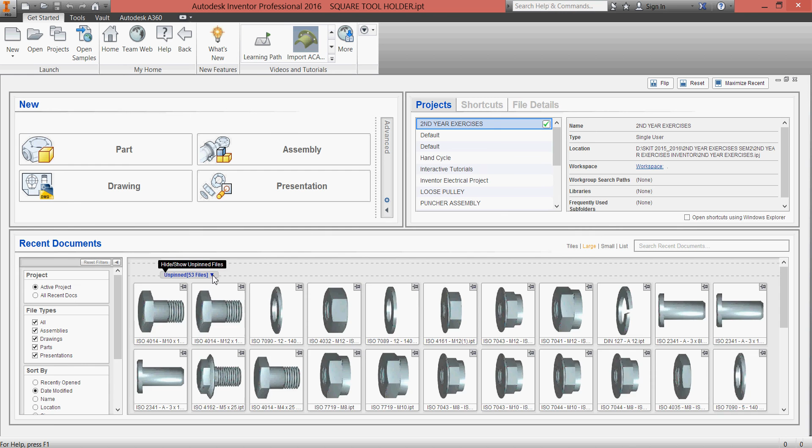I started my Inventor 2016, and this is a new look where we can have several dialog boxes here. This is a new dialog box. We can start our part, drawing, or assembly. This is projects; if you have already worked on projects, you can select your project from here, and it will show the parts or assemblies you worked on. You can close them like this. First of all...

We are metric users, so we have to set our part, assembly, and presentation to be in metric. You can go to this button, configure, and choose millimeter and ISO as default templates. I already chose them. Click OK and everything will be fine.

Before I start any working on Inventor, I prefer to make a project file where all my work will be stored.

So I'll go to projects from here, and go to New, Single User Project.

Next I'll give my project a name, for example, Inventor...

2016 tutorials. And here you can store your project file wherever you wish.

I prefer to store it on the E drive, and here I'll make a new folder and name it the same.

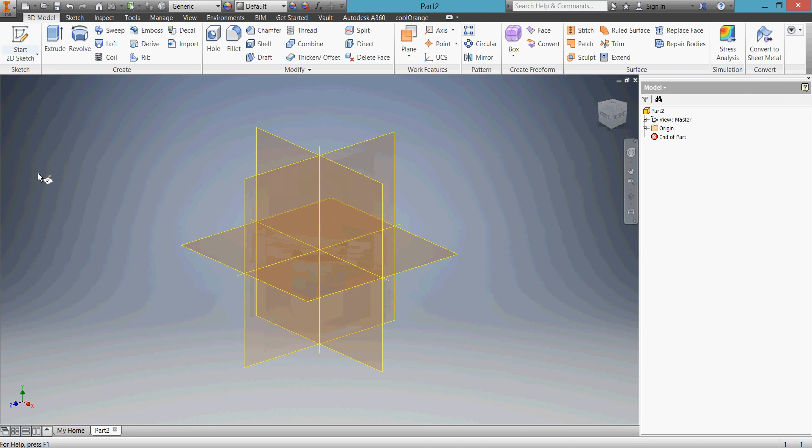This is the part. From here I'll click on 2D Sketch, check on my YZ plane, and start sketching.

Let us memorize what we'll do. So we'll sketch this shape.

Okay, I'll sketch it roughly first, then give it some dimensions. A line from here without any dimension, just making it horizontal. Can you see the signs? Horizontal, vertical, okay.

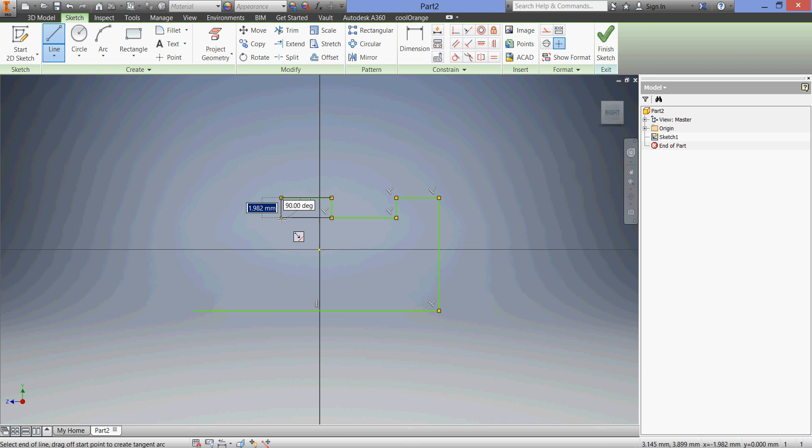Okay, okay, and go down — it's perpendicular. Okay, up here, down. It's too easy.

Here and close. Can you see the glyphs? These we call glyphs.

Okay, what do we have? We have this one, this one, and this one the same size, so I'll give an equal geometric constraint. This one equals this one.

Okay, existing — this one equals this one, and this one equals this one.

Okay, let us give some dimensions. I have a dimension from here to here equal to 100, and it automatically...

gives us a suitable dimension for all the other parts. This is what's good in our new version of Inventor.

And the height is 40. From here to here is 40.

From here to here it's 6 millimeters, and this one is 18.

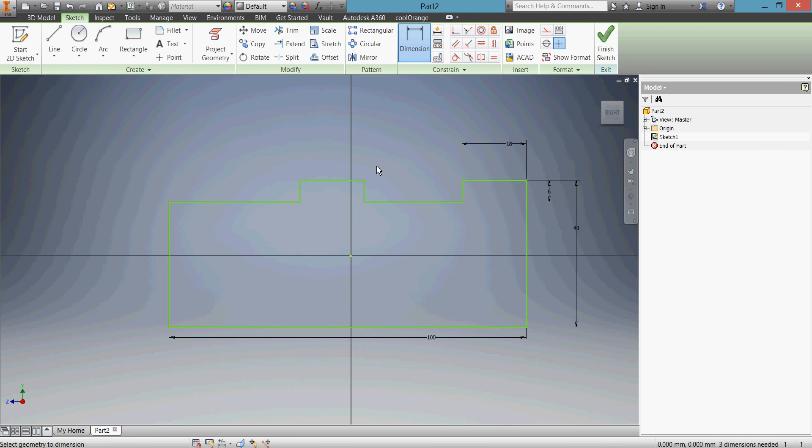I don't need to give this one a dimension because we gave them an equal constraint. And the other thing is what? Let us take a look.

We have 10 between them. Okay, and here this size is 10.

Okay, let us give this dimension to automatically give 34.

If you accept, it will be a driven dimension because we gave this one equal to this segment, equal to this segment, and equal to 6.

40 minus 6 equals 34. It's a driven dimension — if we make this dimension bigger, it will change by itself.

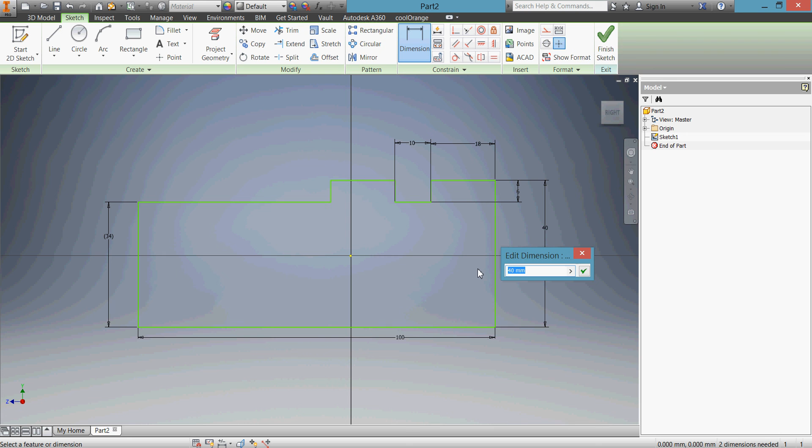For example, 46 — can you see? Okay, so I'll take it back to 40. Sorry, 40.

And I prefer to put my drawings and connect them with the start point, so I'll use the coincident constraint.

I'll take the middle of this base and constrain it here.

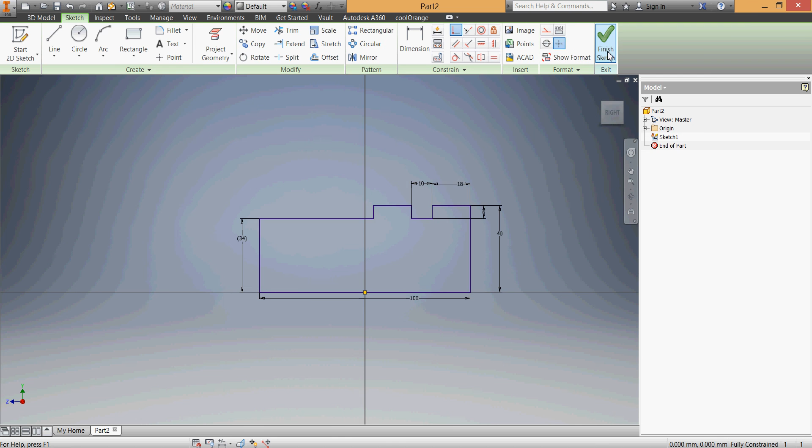I'll finish my sketch now. This is my sketch, and I'll extrude it by 50.

Here's the width, it's 50, so I'll extrude from both sides by 50.

When I extrude from both sides, I have something in mind, because...

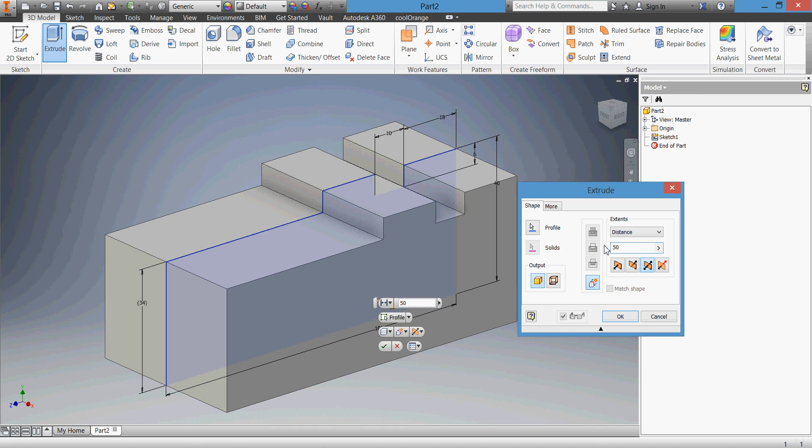I'll use a mirror and I can use the origin. I'll hit OK now and show you.

Here we have the origin planes, so I can use them anytime I need. This one is in the middle, this one in the bottom, and this one is in the middle of my part — that's why I extruded it from both sides.

I'll hit Save for this moment, and I'll name it Square Tool Holder, and hit Save.